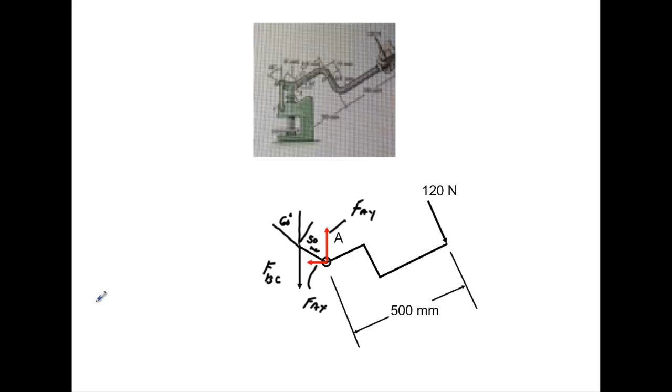Okay, so we'll go ahead and just write all our equations. Let's scroll down a little bit and look just at this member. We can sum the forces in the x direction and set them equal to 0, and sum the forces in the y direction and set them equal to 0. Now we should define what we mean by x and y because that's kind of arbitrary. So we're going to draw an axis system like this. Anything that goes this direction will be our x, and this direction will be y.

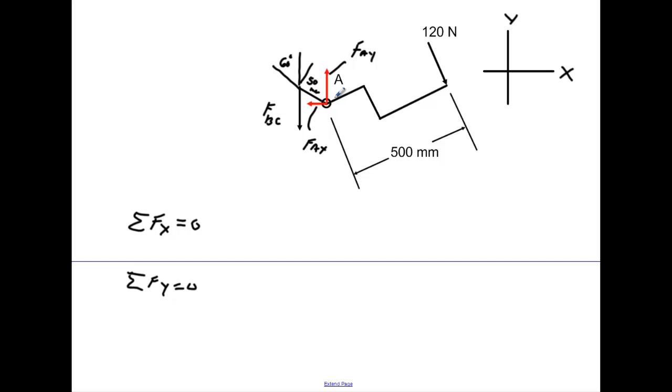Alright, so when we sum our forces in the x direction, you've got to include the angles here. It tells you in the picture that this member is running, it's supposed to be a straight line, at 30 degrees here. So if that's the case, this angle right here is 30 degrees. So I sum my forces in the x direction, letting right be positive and left negative: 120 right here times the sine of 30.

Okay, and some of the textbooks, if this is 30, they'll make this angle 60 and just say the cosine of 60. It's the same thing as sine of 30. That's going to give you the x component of this going to the right, and the only other thing I have is plus FAX is equal to 0. Now this only has a y component, so it does not create any x. So that's all you have, this force and the x component of this.

Now we're going to sum the forces in the y direction and set them equal to 0. When I do that, I'll have minus FBC plus FAY minus 120 times the cosine of 30 is equal to 0. And the only other thing we could do is sum the moments at any point, and the best thing to do in one like this is take point A, because it eliminates these two forces since they have no moment arm.

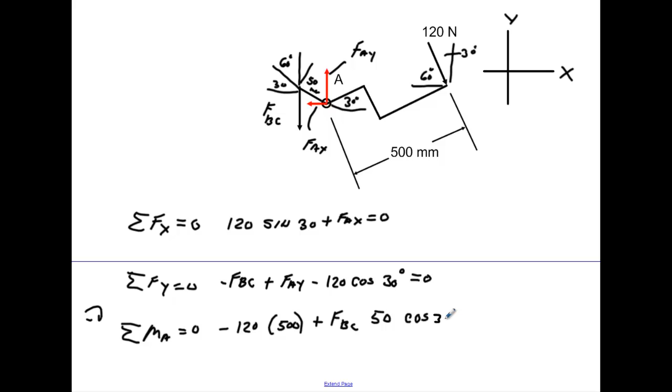Now if this is running at 60 degrees, then this angle here would be 30 degrees. So the perpendicular distance from here to here is 50 times the cosine of 30, and set that equal to 0. All right. Now, I have two unknowns here and one unknown here, so we can find FAX immediately. FAX is going to equal minus 120 times the sine of 30 degrees. I've just brought this to the other side.

I'll grab my calculator. 120 times the sine of 30 gives me 60 newtons. So FAX is going to equal 60 newtons. Now I noticed in the book they made it positive, which I don't understand. Let me draw this better. FAX would have to go back this direction here, because if this object's going this way, its x component goes to the right, so FAX has got to go back the other way. It's not going to affect the answer any.

So then we got that one. Now we're going to run this one right here, because we can't run this one since we have two unknowns. So FBC is equal to, moving this to the other side, 120 times 500 all divided by 50 cosine 30. Run that number real quick. 120 times 500 divided by 50 times the cosine of 30 gives me around 1386.

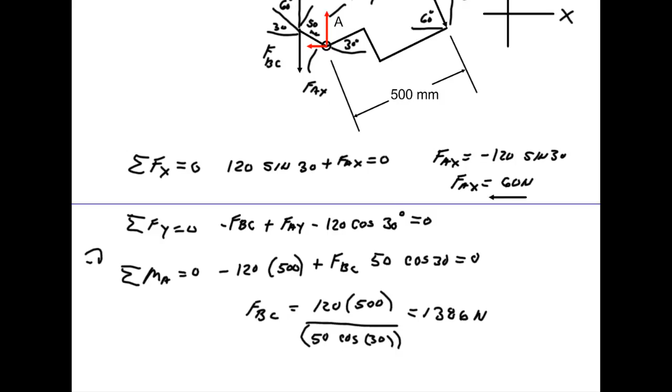Newtons. Okay, that's FBC. Alright, and so we know what the force is coming down. That keeps this object from rotating. Alright, so now we know that, and now we can find the force FAY, because now we know this one. So we come back to this guy right here.

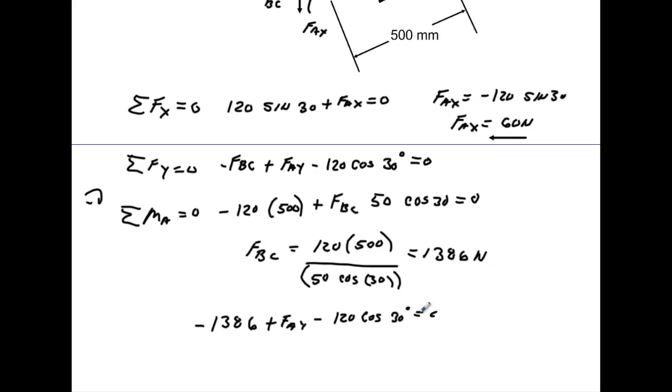We plug in minus 1386 plus FAY minus 120 cosine 30 is equal to 0. Solve for FAY. We're going to move everything to the right side. FAY is going to equal 120 cosine 30 plus 1386. So we do that, plus 120 times cosine 30. That gives me 1490.

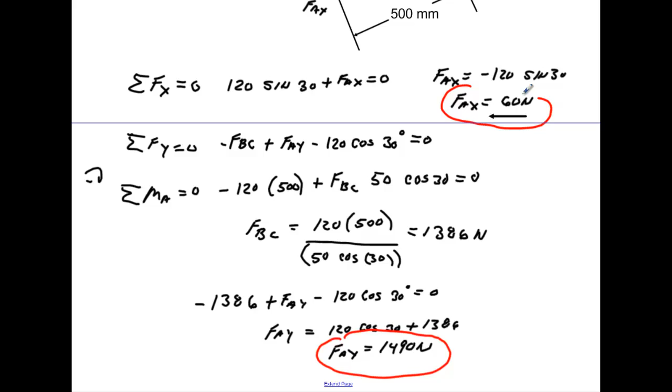Okay, just checking real quick. That was correct. So now we have all the components. So now we're ready to determine what the actual reaction force is. Because we know FAY is 1490. We know FAX is 60. So really what we have here is, if we draw the vectors here, we know we have 1490 going up. We know we have 60 going back this way.

So what we could really do, if we wanted to add the vectors, move this over, we could actually find out what the angle is if we needed to, because that's our resultant force. So we'll go ahead and label these. This is 1490 here, this is our 60 here. Get a different color. So then we could say force at A would equal the square root of 1490 squared plus 60 squared. Run that number real quick.

And that gives a value of about, so the 60 is so small it doesn't do much. That gives us a reaction of about 1491 newtons. And honestly, you could find out what that angle is right here if you needed to by taking 1490 divided by 60, inverse tan would give us the angle. Alright, so that's what the reaction force would be right at A.

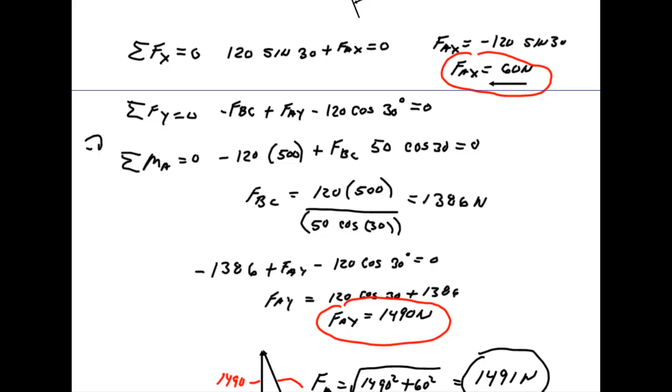Alright, let me just look at the problem again, see if it needs anything else. Alright, I think we're pretty much there. So now we have the force at A. We know what the load would be at FBC because we figured that earlier. Alright, and now the only other thing it wants us to do is determine what's taking place at D.

Okay, so now I'm going to just do a rough sketch of what's taking place here. So I'm going to grab some of this, I'll trim it when I get down here. We're going to take this, edit, copy that. We're going to come down to here. We'll paste that in. And I'm going to clean everything up a little bit so you can see that.

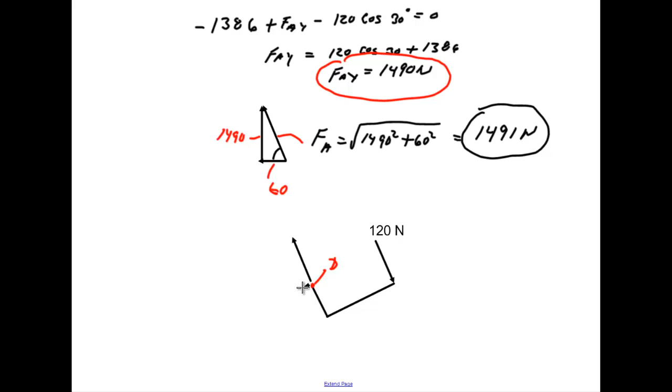Okay, so now if we want to draw a free body diagram of what's taking place at D, I'm going to slide this up a little bit so I can draw my free body diagram better. My reaction forces are going to be like this. This horizontal one is going to equal 0 because there's no horizontal force. This does not cause a horizontal force. And the only other thing is you can tell that this guy is trying to cause it to rotate this way. So we're going to have a moment going back this way. And that's a moment at D.

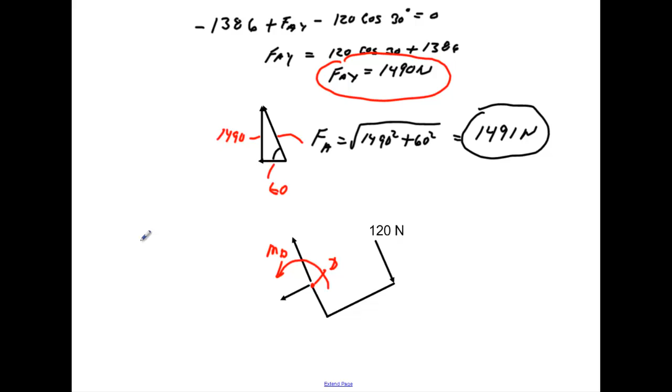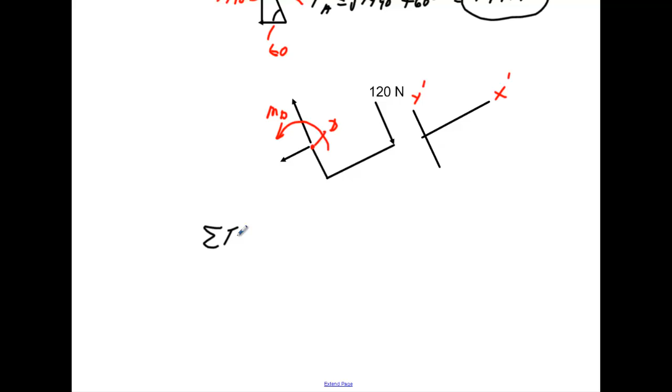So, again, you can create yourself another axis system if you want to. Let me do it this way. Like this. Nothing says you can't. You could make this x prime and y prime, or you could leave it x and y. It doesn't really matter. So again, you do the same thing here. You're going to sum the forces. I'll do a different color. If I sum my forces at D in the x prime direction, I have none. Along x prime, this does not cause any, so we'll make this FDx prime, and FDx prime is equal to 0, because there's nothing to add it to.

If I sum my forces at D in the y prime direction, I will get minus 120 coming down, plus FDy, is equal to 0. FDy would have to be pushing up. So FDy would equal 120 newtons going up. And then the only other thing, sum the moments at D, and you would get 120 newtons. Let me go back to the picture and see what the distance is. Perpendicular distance from the 120 to D, and that is going to be 300.

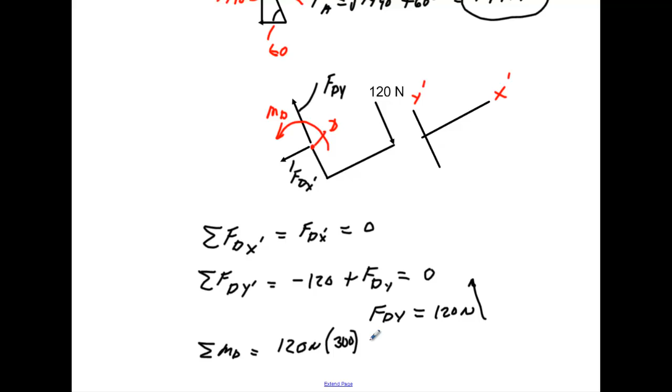And make sure when you do moments, it's always the perpendicular distance from the force, and then you'd have plus the moment at D would equal 0. When I do that in my calculator, 120 times 300, and we should technically change that from millimeters. So 300 divided by 1,000 times 120. I'll just check these numbers real quick. Yeah, that should be right. And that gives me a moment of 36 Newton meters.

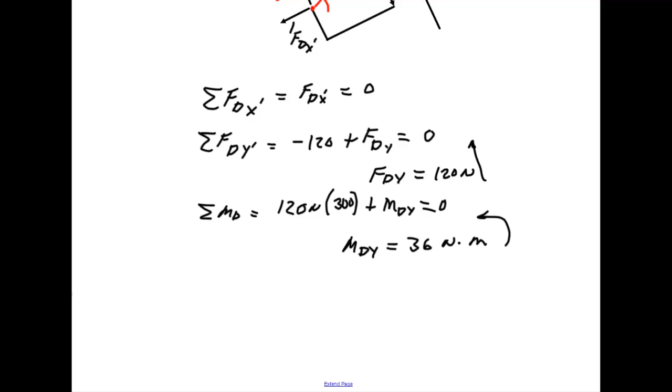So scroll down, MD would equal 36 Newton meters, and it's going back that direction. And that's it. So I hope this video helps you. Again, keep things simple. Draw free body diagrams of each member, not of the system.